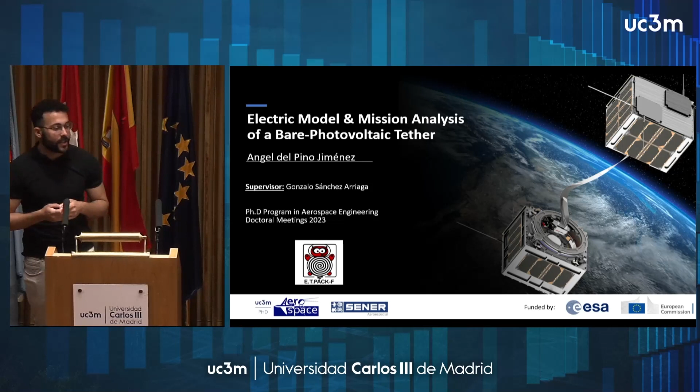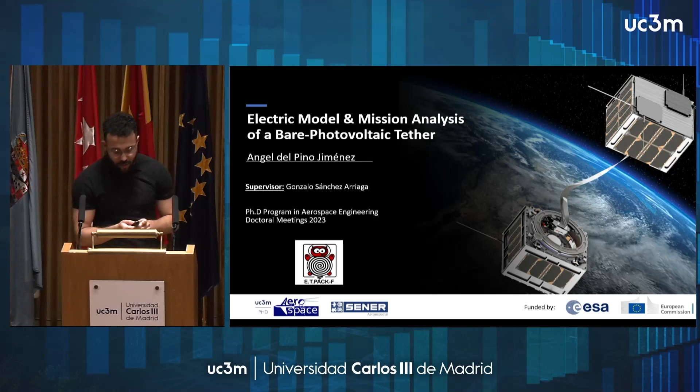I'm Ángel del Pino, and I will present you a very brief overview of my ongoing PhD thesis. It's being supervised by Professor Sánchez Arriaga, and it's been developed within the frame of the ESA project of bare photovoltaic tether and the European Commission project of E.T.PACK, that will be mainly focused on a technology demonstrator about electrodynamic tethers. I will not go into much detail about this E.T.PACK-F project because my colleagues Gasem and more particularly Sergio will give you more details later on.

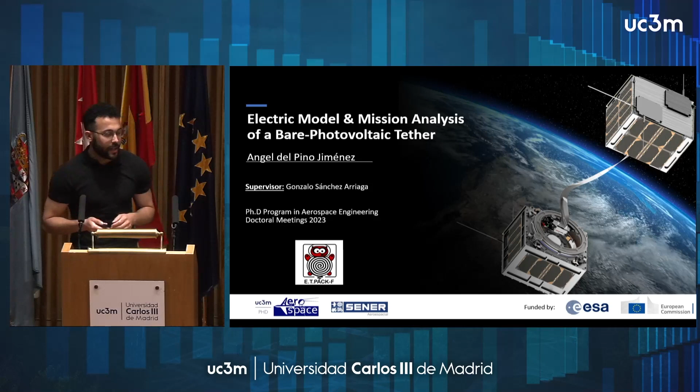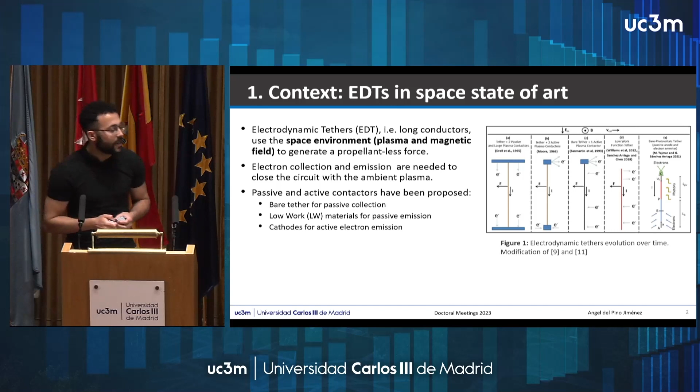But I would like you to know which technology this satellite will be demonstrating. It will be electrodynamic tethers, and electrodynamic tethers in space are a system that could obtain energy in order to move the satellite without using propellant. So this is how it works. It will be a very long conductive wire where a current will flow, and thanks to the Lorentz force, it will generate a force that will actually move the satellite.

First of all, in the 60s, they were using active electron collectors and emitters to capture and to emit back these electrons in the plasma. But with its development, more ideas came to make those systems more passive. So that's, for example, where the bare tether concept appears. You can actually collect electrons with the bare tether itself in space, with the low work function for expelling them. And now we would like to enhance this performance using photovoltaic cell panels on top of the tether.

So how will it be? In this tether we will add solar panels on top. You can have here an idea. This is a very thin solar film layer, about 40 microns thickness and 2.5 centimeters wide, and it will be placed on top of the electrodynamic tether, which will be a tape.

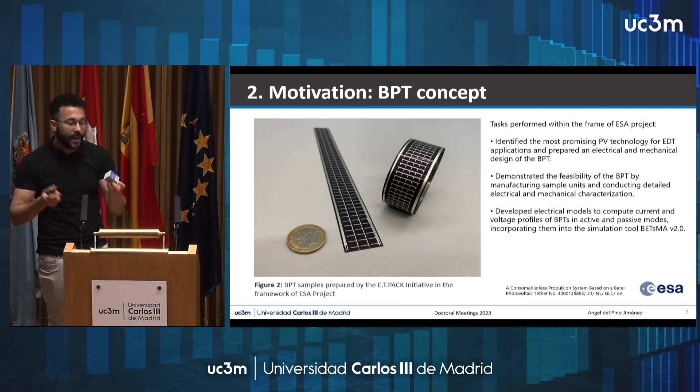So here you can see a cross-sectional view of the tether, and of course we won't be covering the entire tether. I will speak more about that later. But we will distinguish two different sections, one that is fully bare and another that will be bare and photovoltaic. This is important because from the bare tether you will be collecting electrons on both sides, but it's not the case for the photovoltaic cell.

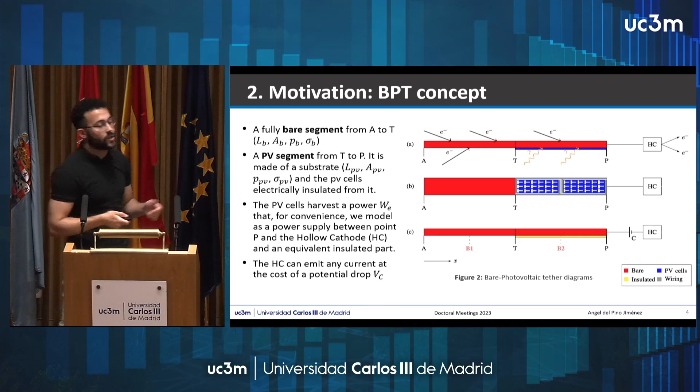And in figure C you can also see two points that are called B1 and B2. These are the zero bias points. Electrodynamic tethers, unlike electrostatic tethers, do not have a constant voltage and current all along the tether. The voltage and current change, and these points are where the voltage goes to zero. These are very important because there's no electron collection and the equations change. And for my case, what is new is that we can have a second bias point in the tether. We can have one single bias point in the bare segment or another in the photovoltaic segment. We can have both of them or none.

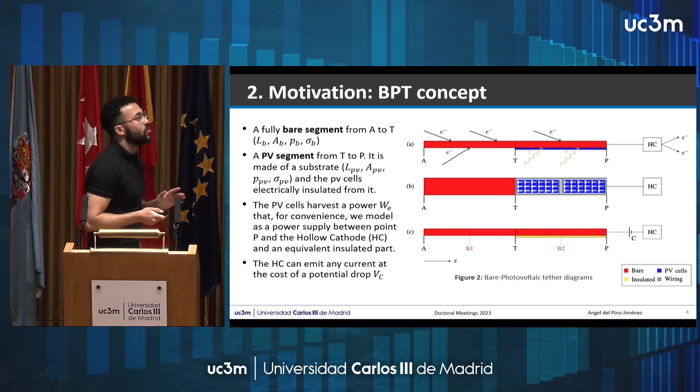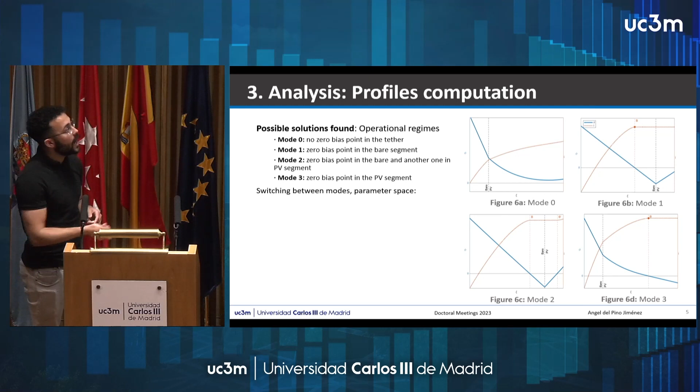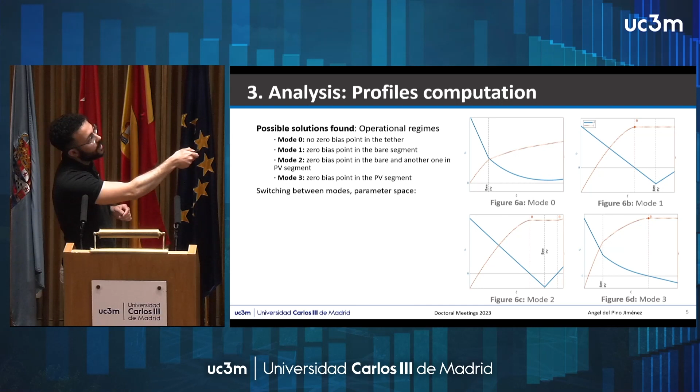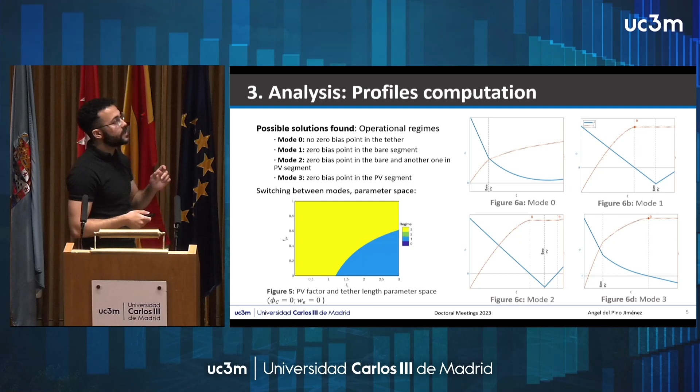So first of all, we started computing the mathematical model. We developed the semi-analytical equations, and we obtained the voltage and current profiles that I was mentioning before, with 0 bias points, 1 bias point in the bare segment, in the photovoltaic, and the case with 2. Also, we have been able to distinguish how the system can change between these regimes, because it's not static. It can change because of the ambient conditions of the satellite.

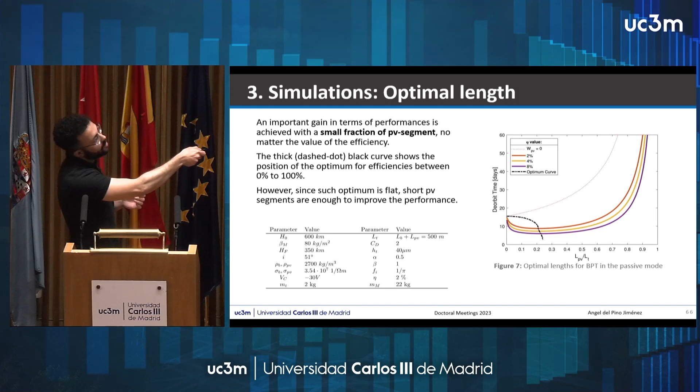As I was telling from the beginning, we will not be covering the entire tether, because if not, we will be losing some electron collection capabilities of the system. Therefore, there is an optimum value, and you can see here the optimum curve, and this black line represents the optimal values for different efficiencies. But for all of them, you can see that from the beginning we're in fact enhancing the performance, and we are in a wide range of this optimal value. So this is great for us.

And moving on to more results, we have also coupled these electrical models into the BETsMA software, which is a mission analysis software developed mainly by my supervisor. We have integrated the photovoltaic tether system, and we can observe here how from 0 meters, which is in green,

Ángel, you have consumed your 5 minutes already.

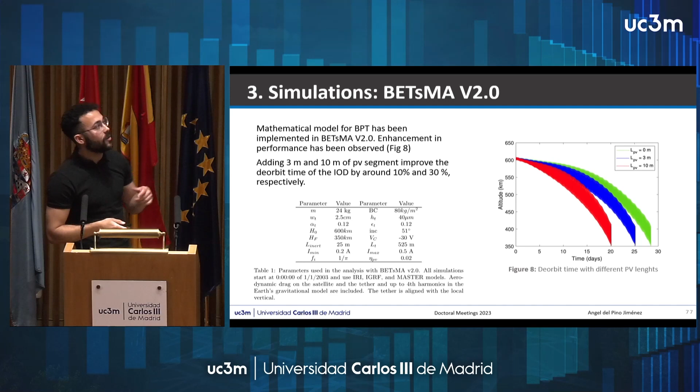Okay. 3 meters in blue, and in red, the deorbit time for 10 meters, and we can observe that the deorbit time is reduced by adding only a small amount of photovoltaic cells.

Also, part of my job is being done at SENER, where we are actually building and assembling the satellite that will demonstrate the electrodynamic tether technology, and my work there is mainly focused on the electrical ground support equipment that will test that the software of the satellite is working correctly, and I will also implement the tether simulator.

Up to now, I have also done some dissemination. I've been in a congress in Bertinoro, in a workshop at ESA, and we are also preparing the first paper with all these results that I was telling you before. So that's all from my side.